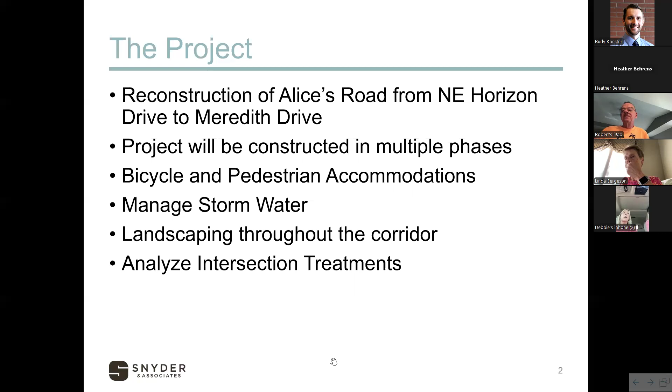There will be bicycle and pedestrian accommodations throughout the entire corridor that are planned. We are also going to have significant stormwater management incorporated into the project, managing both the quantity and quality of stormwater. I'll get into that a little bit more. There will be landscaping throughout the entire corridor. Those concepts haven't been brought very far yet, and you can see why as we get into some options we have to decide on before we can talk about landscaping. And then of course we're going to analyze intersection treatments, and that's what we'll mainly talk about.

This is what the roadway will look like. It's a 2-lane roadway today. That'll be completely reconstructed, so we're not widening anything. Nothing you see today will be there into the future - that'll be completely torn out. Grade will likely change everywhere as we drop into an urban section. This is what it'll look like.

It's in 120 feet of right-of-way. The phase one corridor's permanent right-of-way is mostly established through the entire corridor. We will need temporary construction easements outside of that to blend in slopes and things like that. But for the most part, the 120 feet is established through at least the phase one corridor, not so much when you get north of Douglas.

We'll have 2 lanes in each direction. There'll be a 17-foot center median that will accommodate potential left turn lanes if needed at certain locations. There's a 12.5-foot lane, basically a 12-foot drive lane with an additional 6 inches for the curb and gutter. And then a 10-foot trail on the west side of the roadway, continuing up the entire west side, with a 5-foot sidewalk on the east side.

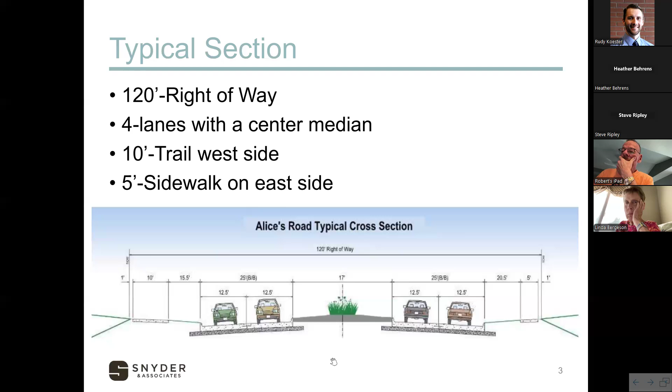So as we move forward here, we already talked about this a little bit. Phase one project, there'll be multiple phases, but the phase one project will stop probably 300 feet south of Douglas, right about the Casey's entrance. We don't want to go any further north than that because that would get into really having to decide what we're doing at the intersection of Douglas and Alice's Road. So that's why we stopped there for ourselves.

The 120 foot of right of way is mostly established through the corridor, and this will be 100% funded between the cities, so it's half Waukee, half city of Clive. We don't have federal funding in this phase, and that's why we can move ahead a little faster.

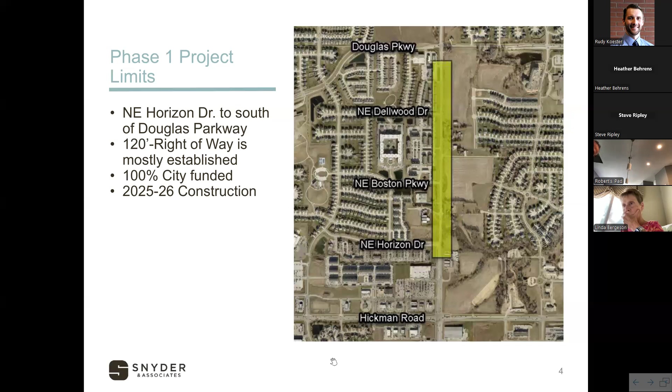So we would plan on hopefully starting early next construction season. I'd say 25, 26 - it all depends on staging and how early in the year we start, but it'd be the bulk of the 25 construction season and then bleeding into the 26 construction season likely as well.

So there'd be future phases. This could be 2 or 3 phases possibly, but we are looking at, as part of future phases, expanding Douglas Parkway. Right now it basically ends just west of Berkshire Parkway. We'd look at, as a future phase, expanding that all the way - that's about a half mile - west of Alice's Road on Douglas Parkway.

We would look at the intersection of Berkshire and Douglas, improving somehow the intersection there, whether that's simply adding a signal or a roundabout or something like that, but we're studying that intersection.

And then north of Douglas, that could be potentially 2 more projects - Douglas to Berkshire we're kind of looking at as a phase, and then Berkshire up to Meredith Drive potentially another phase. That could happen. There's no specific order or specific timeline on that.

The reason why we have that 80 acres off to the west side of Alice's Road - why we're looking at that as well - that's all included in a study area. So that will have federal funding. We already have close to $2 million in federal funding between a couple of the phases right now.

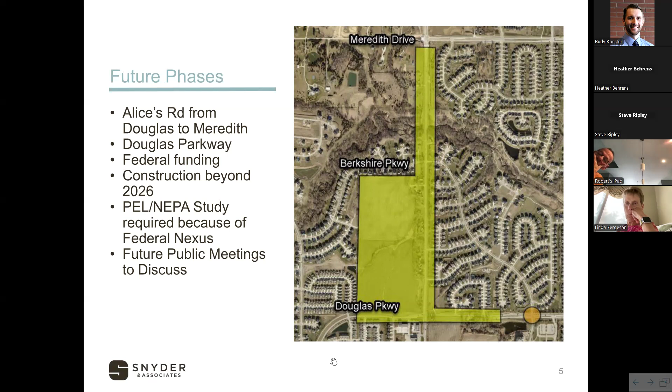One of the first things we did is did a traffic study of the corridor. So we went out and took traffic counts at major intersections. Just generally, there's about 7,900 vehicles a day that travel through the corridor south of Douglas.

And 2050 projections are about 16,000 vehicles a day south of Douglas. So how we come up with that is we kind of look at - DOT does counts of the corridor every few years - we look at how those grow. We also look at the growth in the area.

Over the last period, 15 crashes, about 2 minor injuries, 5 possible injuries.

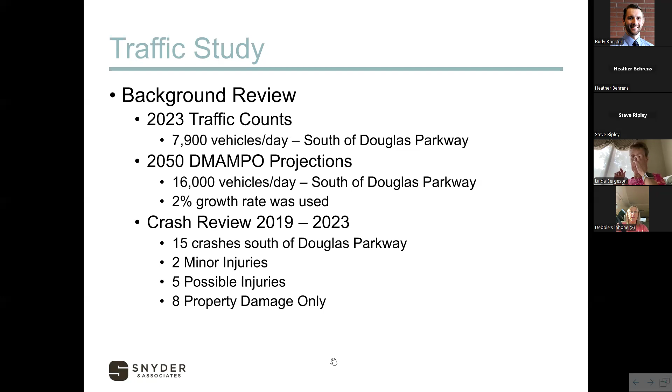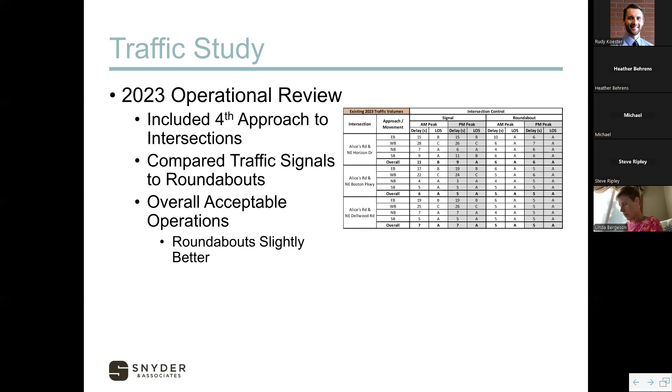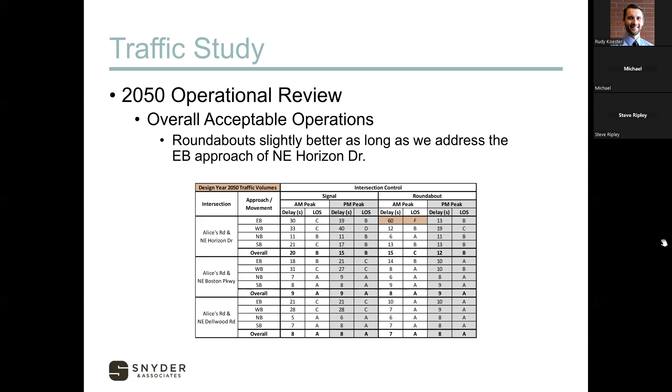So then we looked at trying to make some other decisions of what could drive that intersection control. We looked at the life cycle cost analysis. So these are the things we prepare with that life cycle cost analysis. The first two, construction and maintenance, those are direct costs to the cities for having to build and maintain the road. We also look at...

So we also look at crash costs, travel time delay, fuel costs, emissions costs. Those are basically comparing those delays we just popped up, so that we can project those out to vehicle savings, emission savings, and stuff like that. That's a cost to the traffic. So we look at all those.

I'll pop up some numbers on the next screen, but generally construction and maintenance costs, signals versus roundabouts are actually roughly equal. It's kind of counterintuitive because it looks like a roundabout is so much bigger, but when you actually look at the fact that you need left turn lanes, the paving areas become roughly equal. You do need more right of way for a roundabout, but you need these really expensive signals, and then you need to maintain the signals. So generally everything kind of balances out from a construction and maintenance perspective, and they are fairly equal.

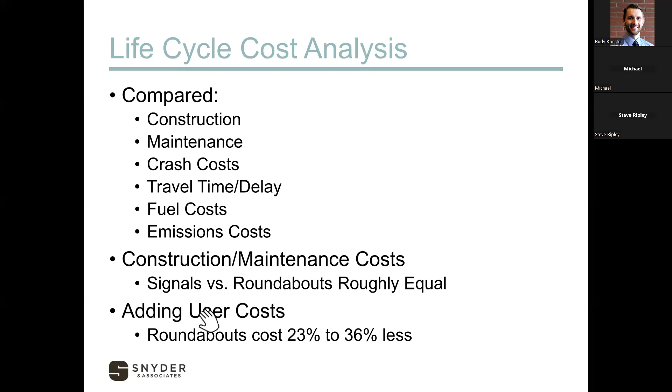If you add those two columns together, where you really get the difference is when you start to bring in those, examining the crashes that we normally see at a signalized intersection versus a roundabout, and then the travel time, which is fuel costs, emissions costs, cost to the users. If we look at those over the life, up to 2050, I believe, is where we did the analysis, we can see that there's a significant savings with the roundabouts versus the signals.

Hey, can you go back? Sure. Thanks. Sure.

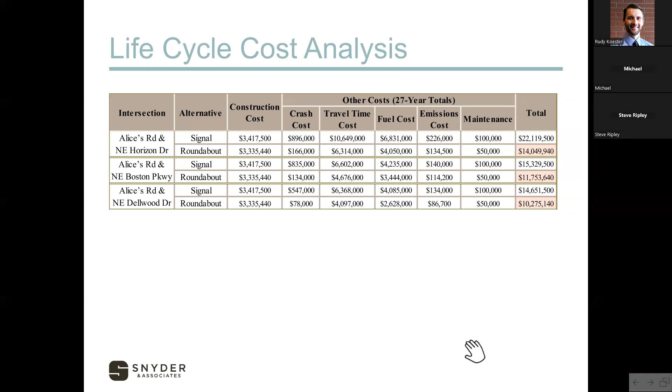So then we can kind of look at, so they both operate fairly well in this corridor. They, for the most part, have relatively equal construction and maintenance costs. Obviously, the user cost of the traveling public is quite a bit less with the roundabouts.

So then we kind of looked at some other pros and cons, I guess, of the different options. So when you're talking about a signalized intersection, they generally have a smaller footprint for the most part, unless you start tacking on right turn lanes and things like that. The signalized intersections generally fit in 120 feet or so, whereas for a roundabout, we need quite a bit more footprint for that.

With signalized intersections, we can add those in the future as traffic requires it. I doubt that if we went that route, that we would actually put signals in the day it opens. It would probably be driven by, as the fourth leg of the intersection is added, if there is, as traffic picks up, then at some point in the future you can add the signal at that point. Whereas a roundabout, you basically have to build what you're going to build. It works today and it works in 20 years.

And it's also familiar to drivers. I think we can all say that generally people understand traffic signals, whether they obey them or not, but they generally understand traffic signals. Roundabouts, especially in the western suburbs, I'd say they're becoming more common, but maybe still a little bit more of an anomaly.

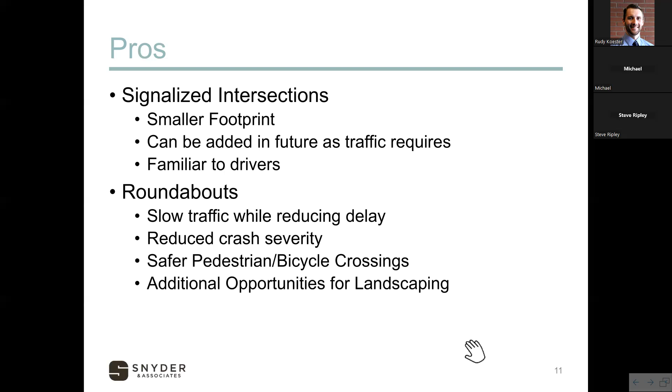We kind of went through these already. Signalized intersections have increased delays throughout all times of day. If it's 10 o'clock at night, you can't flip off the traffic signal, so even if you don't need it then, you're still going to wait. Generally there are more severe crashes, or more severe types of crashes, and more conflict points, as opposed to at a roundabout where it's really one stage at a time that you're worried about.

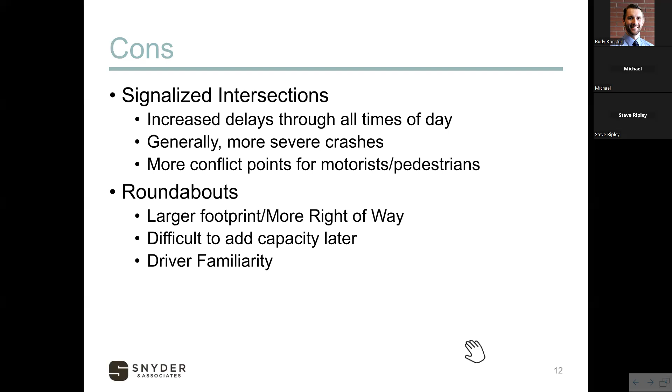Roundabouts do take up more real estate, so they will not fit in a 120 foot right of way. Wherever we have those, we would need to purchase additional right of way. We also can't really add capacity later to roundabouts. We have to design for 2050 traffic, and what it's going to be today needs to work in the future as well. It's not that you can't go back, but it's a fairly major project to add capacity later, versus just popping in a signal. And then there's driver familiarity, which becomes less of an issue as we get more of them, but it's something we've heard quite a bit about.

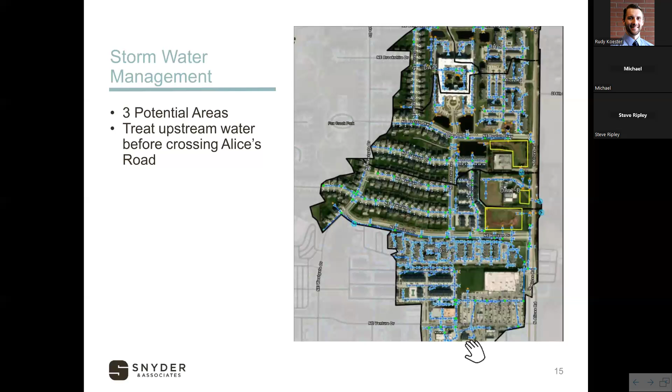So what we're looking at doing is improving those detention basins and maybe these areas. All the areas that come in there, we can do things to improve. For the detention basin, we can change the outlet a little bit so it detains some of those smaller storms while still accommodating the large storms.

We can do some things with the soils in the bottom of the basin that may not look that much different when we get it all said and done, but it will allow more rainwater to actually infiltrate before it gets into the creeks and streams, which improves water quality and some of the erosion downstream. So those are some areas we're looking at.

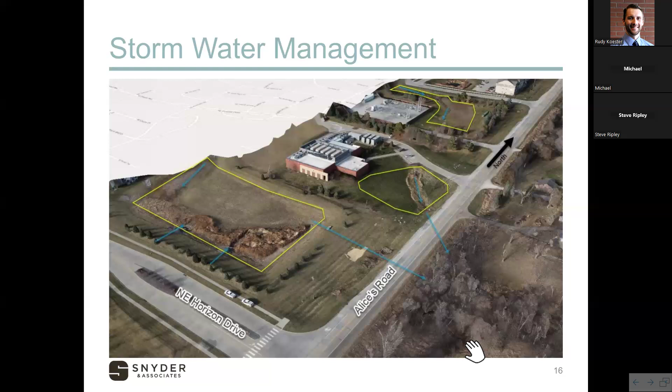We've talked to MidAmerican, talked to the data center, talked to NAP, who controls that basin, and we would look at continuing to work with them to see if we can provide some stormwater management opportunities in those areas.

So some of the next steps as we move forward for phase one: we've got to finalize the project footprint. In the fairly near future we have to make a decision on roundabouts versus signals, so if we need additional right of way, we can go out and negotiate that with property owners. The stormwater design will continue - we'll continue to finalize those stormwater management areas. For landscape design, after we know what the roadway will look like, we'll move forward with the landscaping concepts.

This area is Waukee and Clive, as you're well aware, so we look at the phase one project as more of a transition area. North of Douglas will probably look a lot different, but here it will let you know you're in both Waukee and Clive. The next phases will look a little different to show you the transition to Clive. There will be additional public input or opportunities for public input.

When you see us this fall, there'll be some more definitive plans there, and I can tell you a lot more about construction staging and stuff like that. Then in the winter or early spring of next year, we can actually go out and take bids from contractors - that would be the ideal situation. Construction start is spring of 2025 or early summer 2025, which is what we're shooting for.

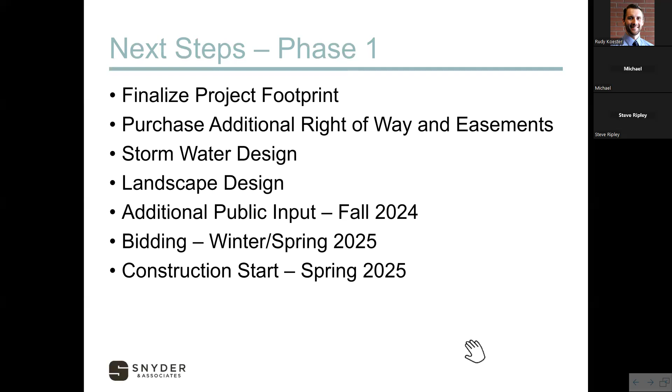Separate from that, you'll also be seeing some public input opportunities for those future phases as we look at alternatives and the design of those corridors as well.

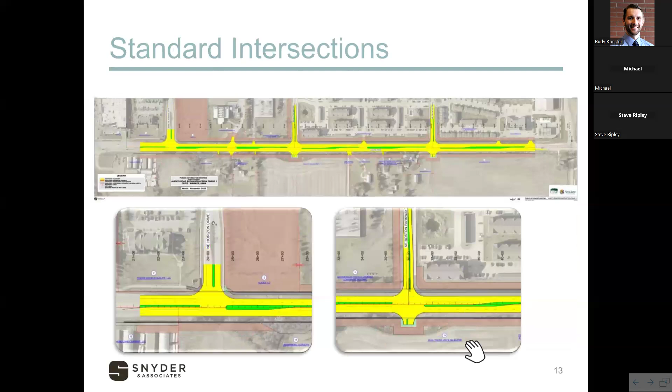So, one of the things, now that you mentioned that - I've heard that quite a bit about 142nd and Douglas - is that, especially with a 2-lane roundabout, it's designed for traffic for the next 25 to 30 years. What people can tend to do is get in the right lane, then skip over to the left lane, then skip back to the right lane, trying to drive it a little faster. We try to do some geometry things, splitting those entry lanes apart. You probably don't see that at 142nd and Douglas, but here we'll split those apart to try to get people in the right lane and force them to drive the way we want.

So is that green like a raised median? Yes, the green is the raised median. So this area is here, and in this area, that is creating a pedestrian refuge. The pedestrians would cross there, then they have a refuge there, and then they go that way. So that's one of the things with roundabouts - the driver coming in worries about the pedestrian first, yields to the pedestrian, gets past them, and yields to the person in the circle. Then as they drive through, they have to yield again if there's someone in that lane.

I have a question for you - 3 roundabouts is such a short distance. That seems like way overkill to slow people down, 3 of them in that short of a distance. Yeah, so it's not necessarily 3 just to slow people down. It's 3 because there eventually needs to be some kind of intersection control at those major intersections. So that's really the reason for the roundabouts.